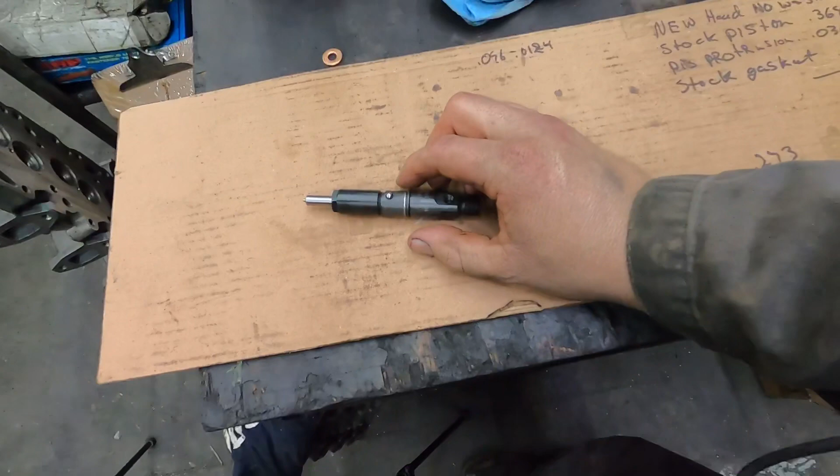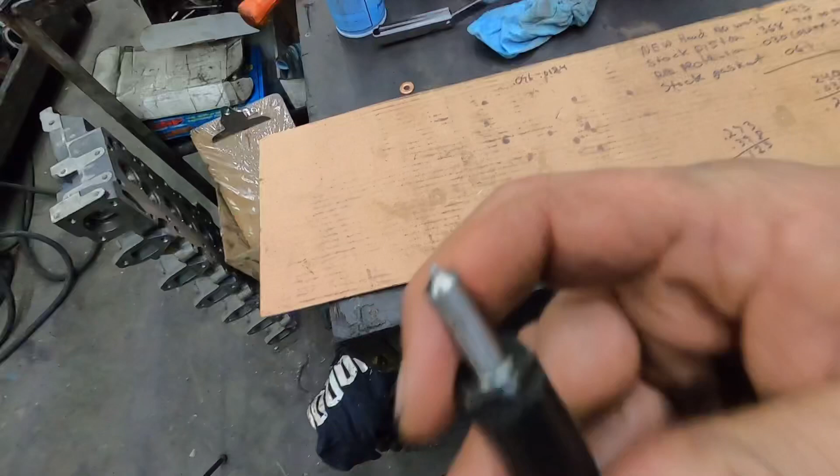So I got an injector with a sack style nozzle on it. So the sack on the nozzle is a little bit longer than some of the VCO or microblind style. They're shorter. So depending on how big the sack is, that is determined. But if you're measuring, you want to measure how far this is going to stick out. And for this instance, I'm not even going to put a washer in there.

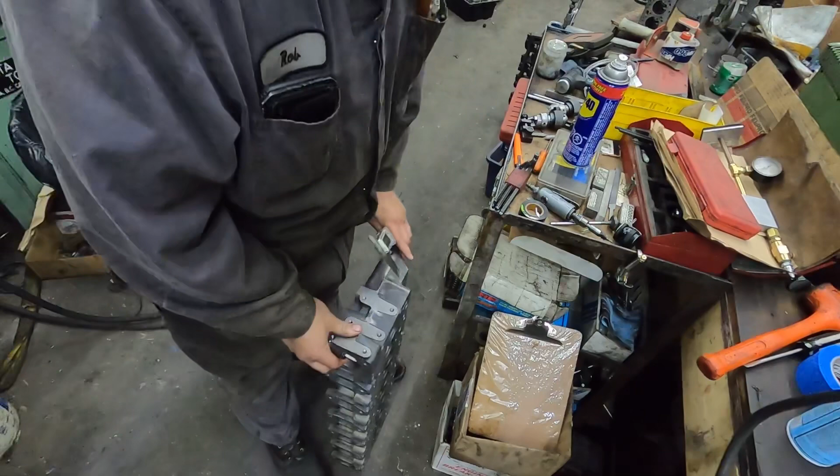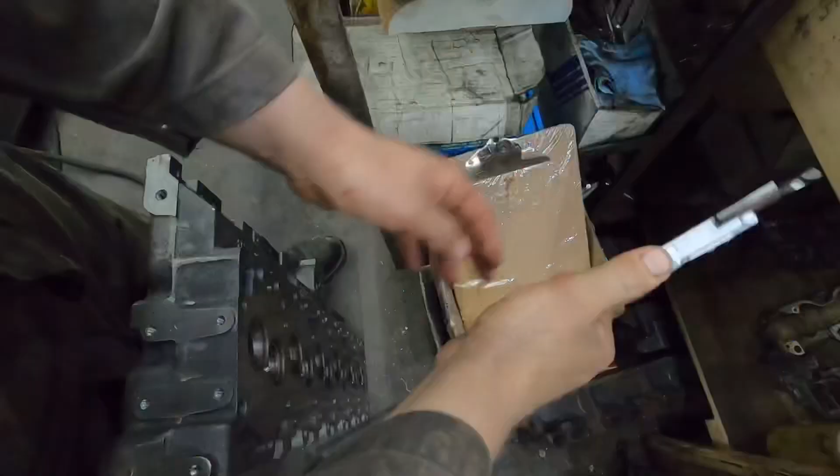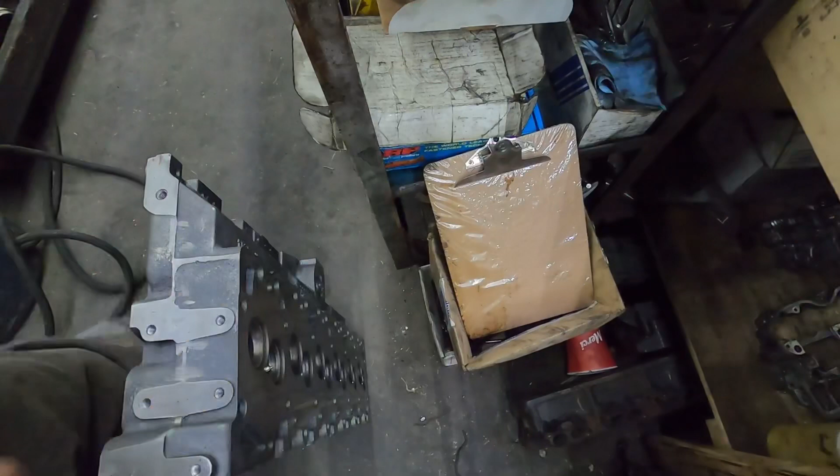So for instance, just going to check this to make sure we are zeroed. So what you're going to do is you take that from the head and then come straight down on top of the nozzle. So this nozzle sticks out 243 thou, and that's with no washer at all.

Now, so if we put a 60 thou washer in there, I got more than one sitting here. You put a 60 thou washer in there. The 60 thou washer is going to adjust it from 243 to 143. And the reason for that is the angle that it's on, right? We're not measuring perfectly straight.

This is a brand new head, Chinese head, mind you, or aftermarket, if you want to be technical. So I prefer them to stick out more, especially if you're going to do any hot rodding on it. Checking this, honestly, you'd never have to worry, and that's actually the question that I had today, was whether or not it could have hit the piston. So I brought a piston out.

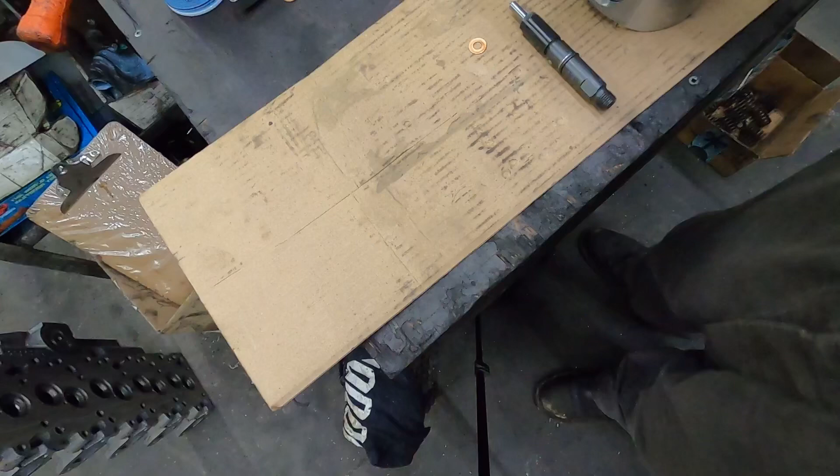So checking that, with no washer it was 243 thou. So we were at 243 thou of the nozzle sticking out on an angle, coming perfectly straight, or as perfectly straight as you're going to measure it with a caliper. That's not really technically the proper way to measure it if you wanted to measure it properly, but close enough for what we're doing.

So get this over here, 243 thou of protrusion on it with no washer at all. Now, don't get me wrong, you can't run it with no washer. You have to run it with a washer. But now, if you take this injector, no washer.

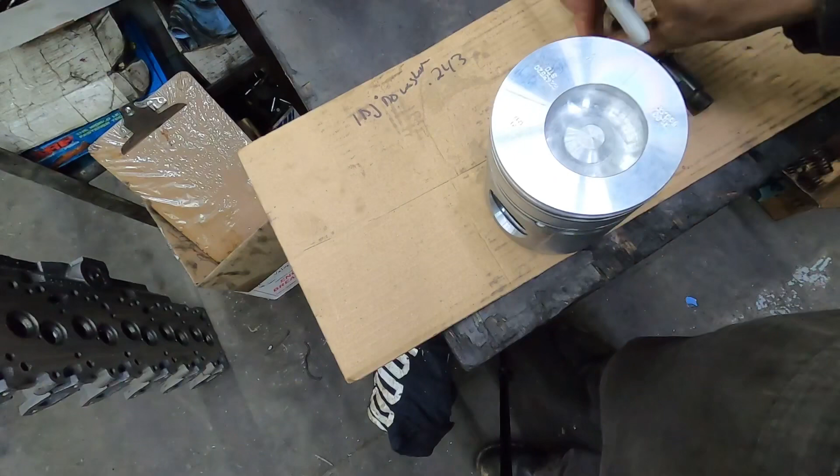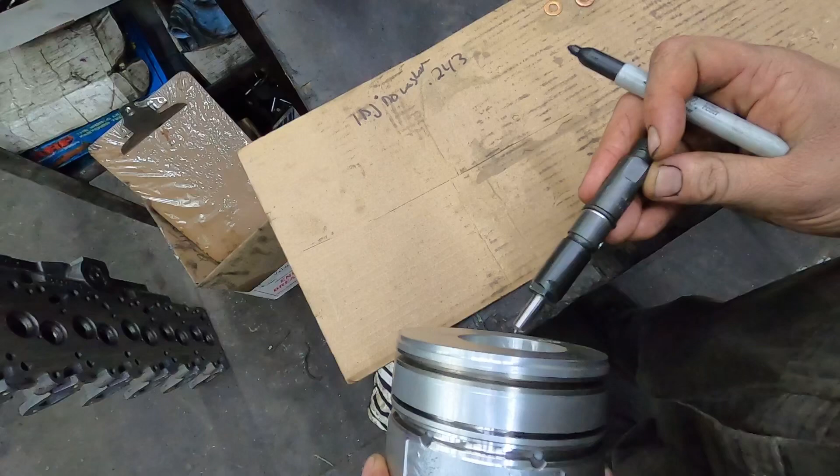Now, basically, by running a thin washer, which is that one, versus a thick washer, all you do is you change the angle. Oh, I shouldn't say angle, you don't change the angle. You change the depth that the injector is going to go, get this into view, the depth that the injector is going to spray inside the bowl.

So for a performance application, if you have the top of the spray pattern kind of coming like that, for something that you're using constantly, like street driving, that was probably not in the right spot, but just for sake of drawing them on there, what I classify as a perfect burn in the bowl is going to be kind of like that. So you'll see a different color spot where the fire is coming around.

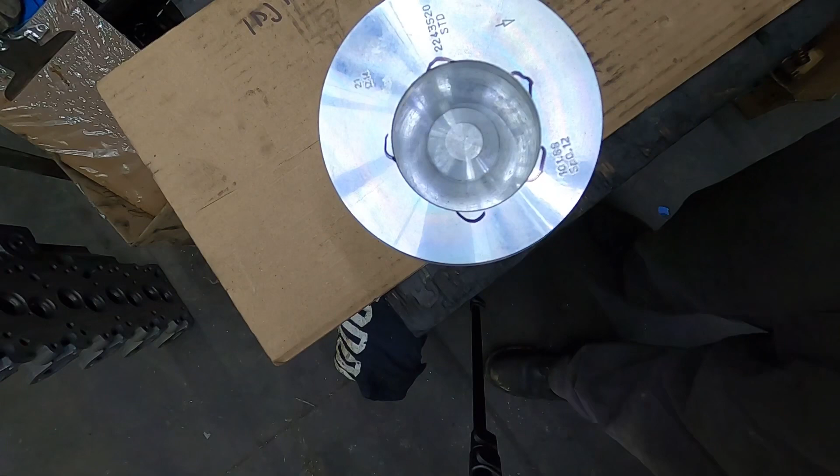If you get them way, way out here, then the amount of timing for how far the bowl is up there is too much. So that's the reason that you use thin. So this is the thick washer, which is, pretty sure it's 60 thou. We just measured it, so yeah. Measures 64 thou actually, but 60 thou.

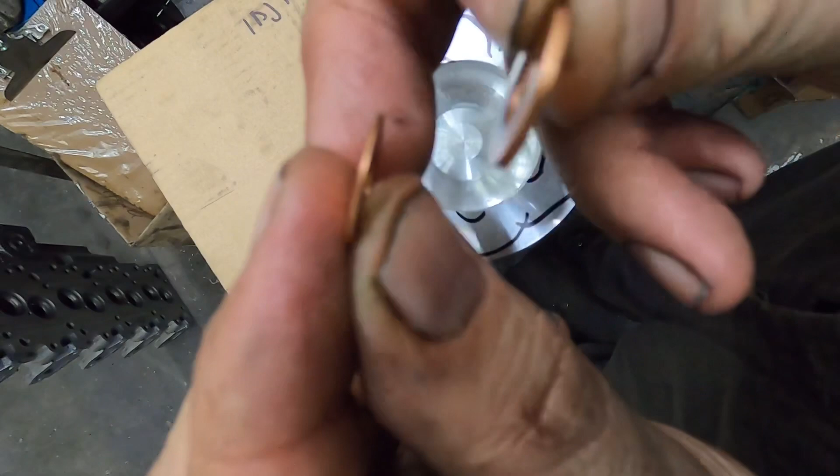Because you want the fire to happen in the bowl, come around the bowl and shove the piston down. Now if it's happening way out here, you're not getting the same effect and you're actually heat soaking the top of the piston, which it's not designed to do.

So basically, if you're gonna run stock timing with stock injectors, you wanna run a thick copper washer. And if you're going to run anything performance-wise that you want to add timing to, if you're changing the injectors, don't get me wrong, if you're staying below 18 degrees, even probably 20 degrees, this washer will work. But I would recommend, especially if you have the injectors out, to go to a thin washer, because you can add more timing, it keeps it in the bowl.

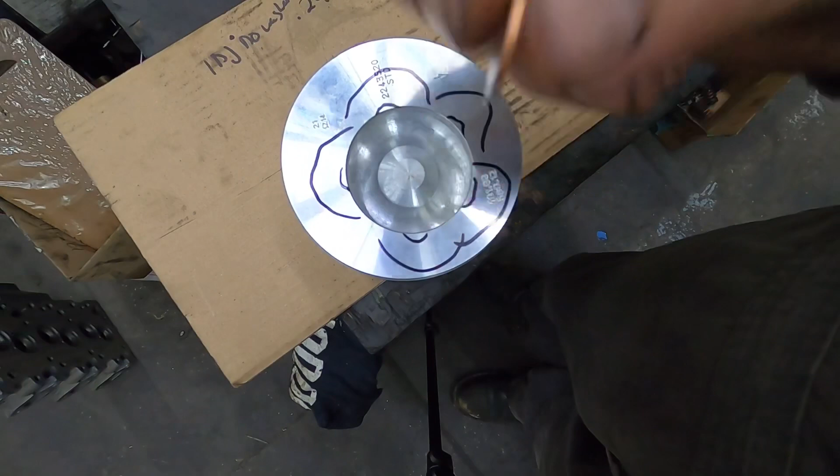Now, the reason that Cummins used the spec that they used was an emissions thing. But you got to remember, emissions at 12.5 degrees, 13 degrees, 14 degrees, this copper washer is what they wanted you to use. Now, not many of us are leaving the trucks stock. So if that's the case, when you're changing injectors, having rebuilt injectors, I would recommend going to the thin washer, so that you're keeping everything inside the bowl the way that you want.

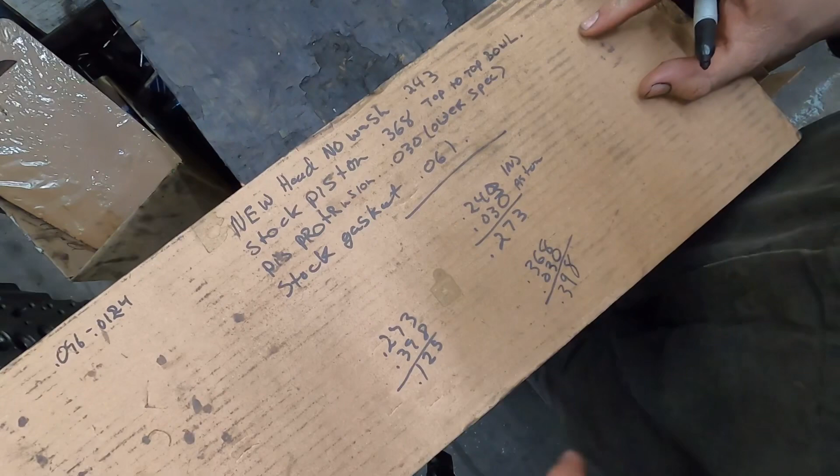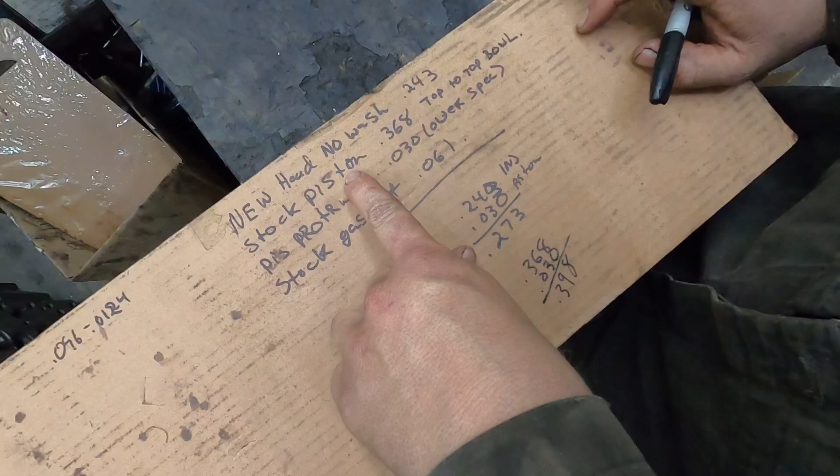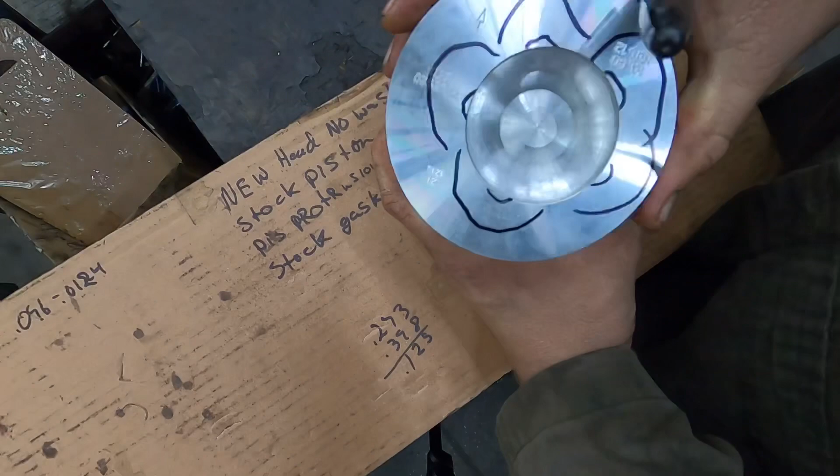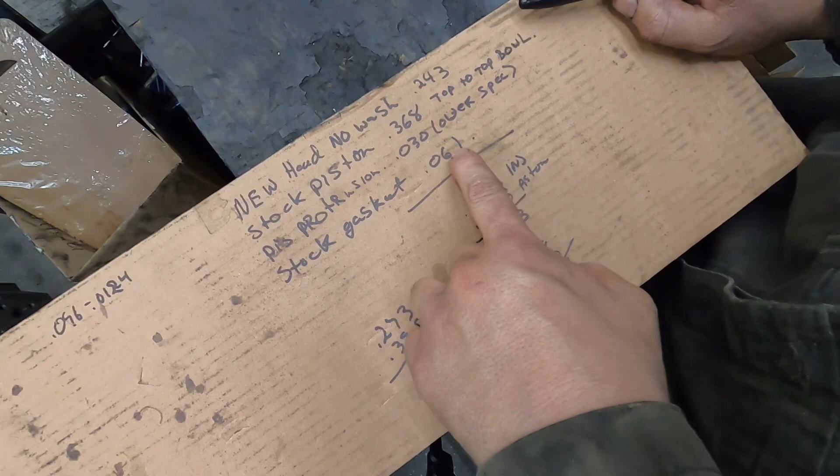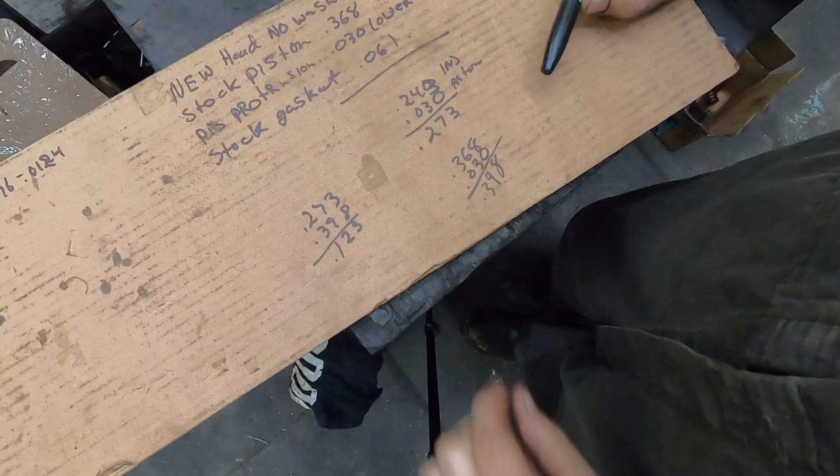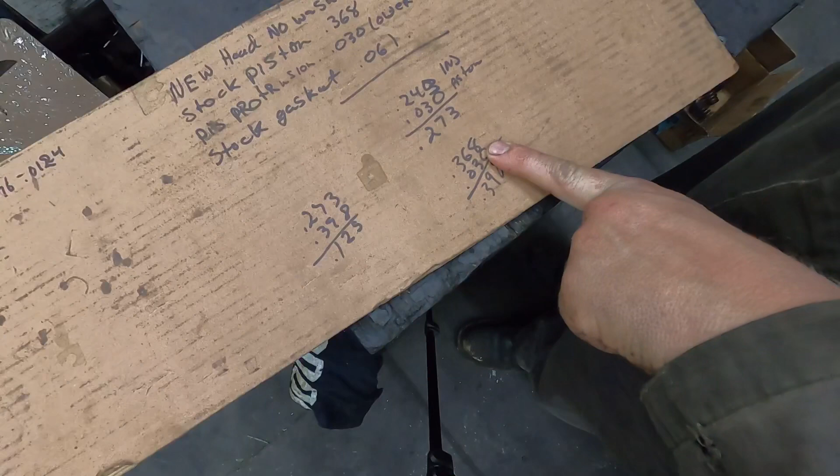If you take the injector at 243 thou plus your piston protrusion, which is 30 thou, you're left with 273. And if you take the extra 30 thou, which is actually 31 thou, but for simplicity I put 30, the difference between your head gaskets, because your head gasket is going to add 30 thou to the thickness between the head and the block, right? Or the head and the piston in this case. So there's 30 thou, and the 368 was the distance from the top of the combustion bowl dome to the top of the piston. So you're 398 thou.

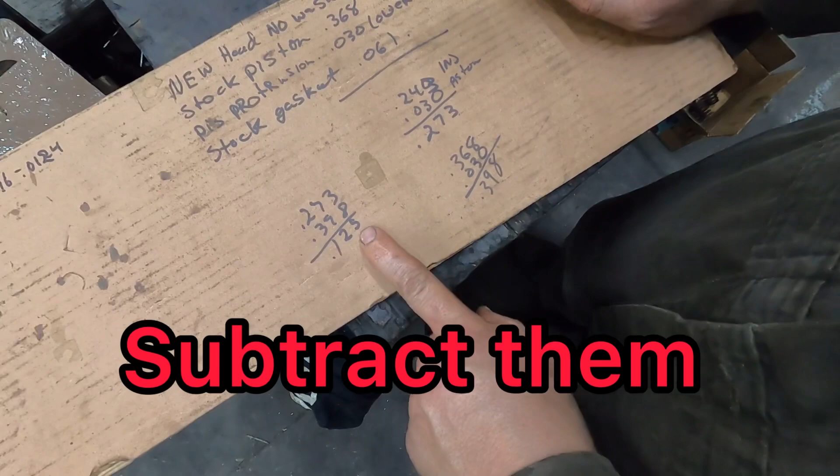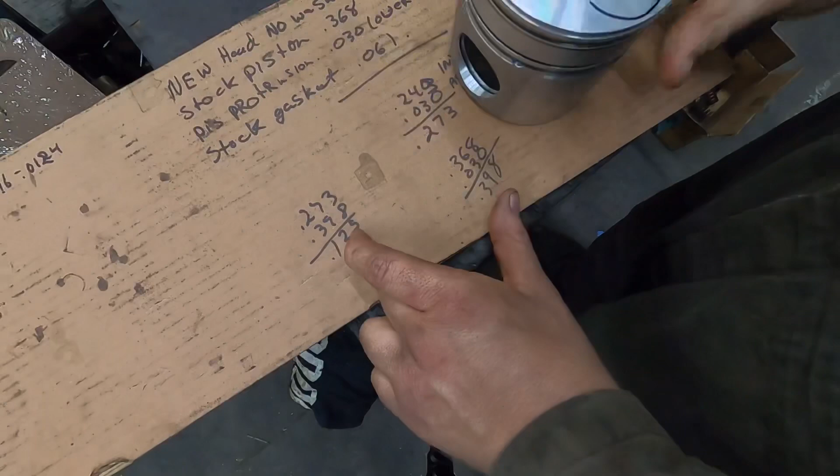So if you take those two and you subtract them, you end up with 125 thou clearance between this surface right here, which the injector is basically centered in, kind of like this, right? With no washer at all, you still have 125 thou clearance. So if you've surfaced more than 125 thou off of the head and/or block combined, the block and the head are junk. So you don't really need to worry.

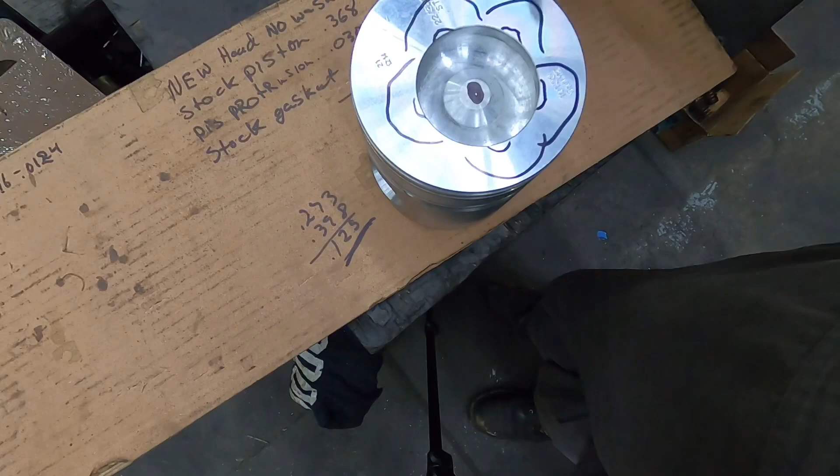Even doing a 6.1 build where you're using a 6.7 crank, 5.9 pistons, and then you chop a bunch off the top of the piston, which you wouldn't use this piston for, it's the wrong design for doing that. But doing that, you're still only talking, you take off 80 thou, and that's with no copper washer. So there's no way for this to hit that. You don't have to worry about it.

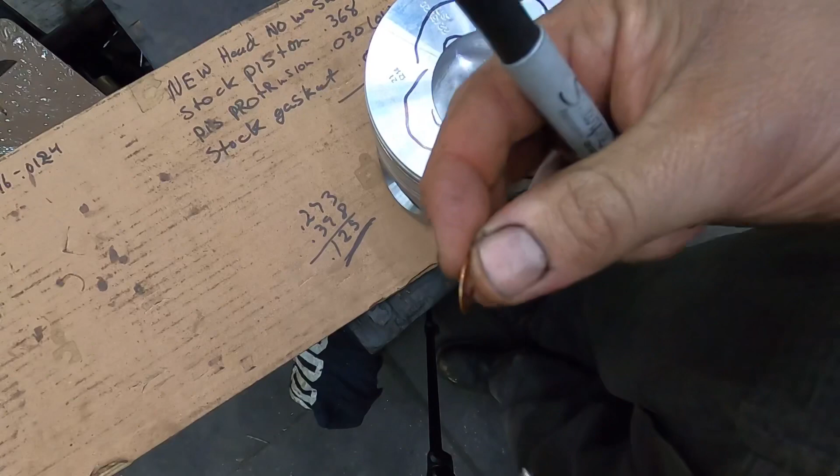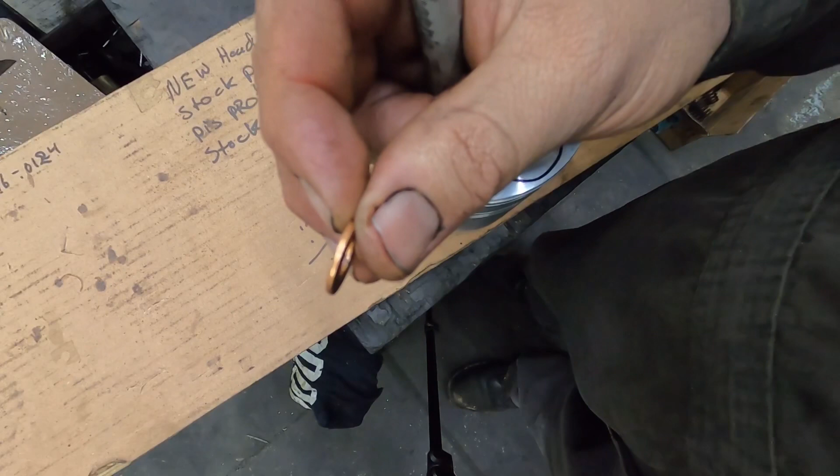So like I said, if you're doing performance, use these guys. This is my opinion. If you're doing performance, use the real thin ones, which are like 22 to 25 thou. And then if you're going to stay stock with stock timing or close to stock timing, let's say within 5-6 degrees of stock timing, you can just use a factory style washer. Usually when you buy the install kit, it's going to come with an assortment, I think there's 4 sizes, so there's these 2 and then 2 in between.

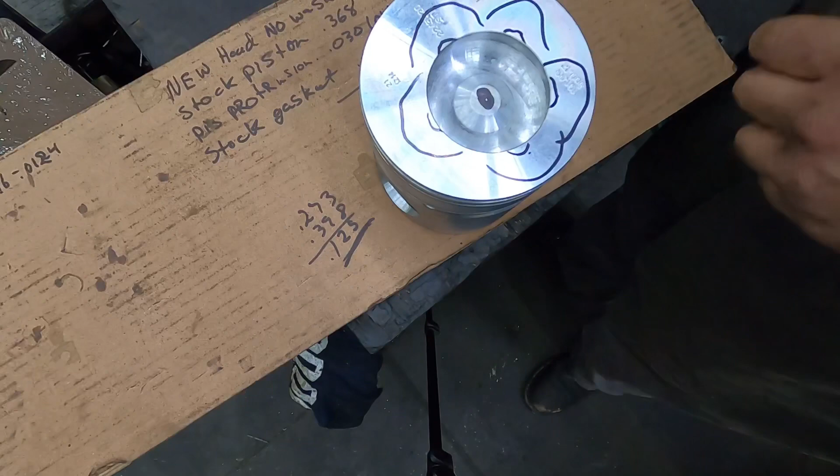So anyways, I just wanted to do that just so that guys knew. It's not really rocket science when it comes down to it, but I see lots of posts and lots of people talking about stuff, and I like to explain. It's hard to explain over messaging sometimes, so it's easier for me to do a video, and then anybody that needs to watch the video can watch the video.